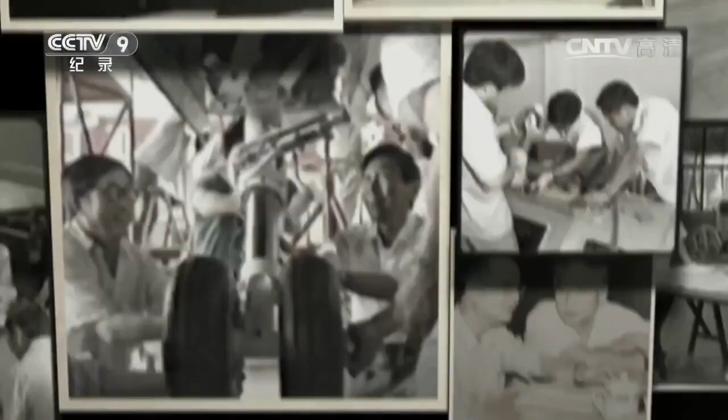The dream of generations of aviation people. 20 years of unremitting pursuit. Finding a way out on the misty ridge. Test courage in crises. This is a milestone in China's aviation industry. It is also a monument to loyalty and responsibility.

Third-generation fighter is equipped with new stealth technology and avionics system and advanced armament, which is effective for land or sea combat. While the J-10C fighters have been involved in actual combat training and played a great role in maneuvers, the Red Sword 2016 and 2017, J-10C is considered one of the best single-engine fighter jets ever made.

How could China achieve this in such a short period of time? Let's look back at the history of 20 years of how the J-10 had been developed. Today, the 10th China International Aerospace Expo kicked off in Zhuhai. The Chinese Air Force's aerobatic team also sent J-10 fighter jets flown by female pilots. They perform air ballet above the Zhuhai Sea.

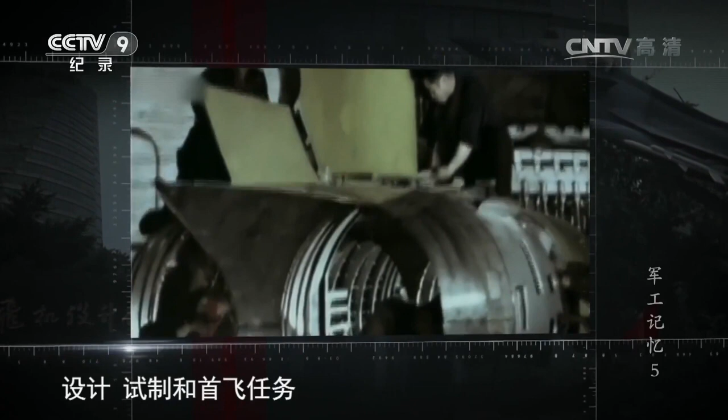This is Chengdu Aircraft Design Institute, where the J-10 was born. 40 years ago, due to China's strategic layout, these researchers moved from the northeast to the southwest. Just before the relocation, the research personnel of the institute had just participated in the design, trial production and first flight of the J-8 fighter jet. J-8 is a high-altitude, high-speed fighter, mainly undertaking air control and interception tasks. It is one of the main battle planes in the Chinese Air Force.

In the sequence of fighter jets development, the J-8 belongs to the second-generation fighter. At that time, around the world, the development of fighter jets had entered a brand new era. In the middle of last century, through several regional wars, people discovered that the high-altitude and high-speed second-generation fighters have limitations in actual combat. The flight range is narrow and the maneuverability is poor at medium and low altitudes. Weak ground attack capabilities.

The United States and the Soviet Union have been engaged in military competitions in this area. The F-15 and Su-27 third-generation fighters were developed respectively. They are much superior to the second-generation fighters in terms of overall performance, especially mid- and low-altitude mobility and comprehensive combat capabilities. The second-generation fighter will be hardly seen while turning, then you can see it when it comes back, because it has a very large turning radius. Look at the third-generation fighter flying in the sky. In normal weather, it will be within your sight.

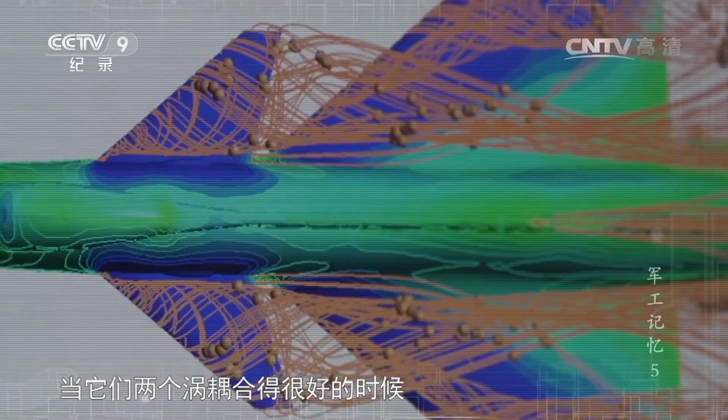Although there was some research on the canard layout when the J-9 was developed, it was still in the initial stage. This inevitably makes people suspicious. Song Wencong was assigned to refine the design plan as soon as possible.

Need another review. Once the plan for the aircraft is drawn up, there is still more work to be done. I said give me 1.5 years, but I only got 1 year. I said okay for 1 year. It was very difficult that year.

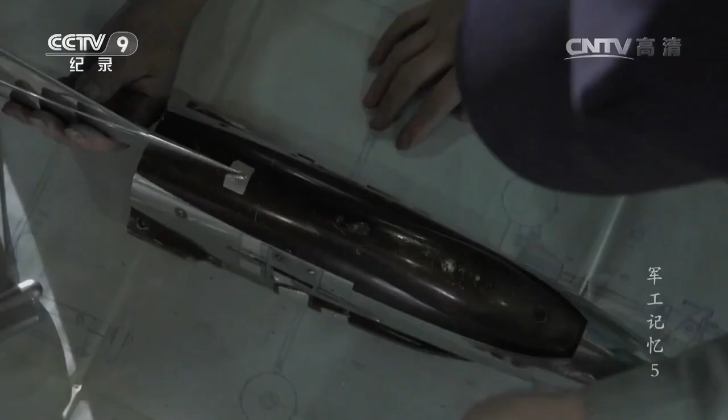The aerodynamic layout should be refined. A lot of wind tunnel tests must be done to simulate the state of the aircraft in the air. This is an essential step in the development of aircraft.

This is our model for high-speed wind tunnel tests. Due to the high speed and pressure in the wind tunnel, this model should be made of metal. The shape of the model is made completely according to the real shape of the aircraft.

The wind tunnel was high-end test equipment at the time. There is no wind tunnel in general research institutes. You could only go to the professional wind tunnels built deep in the mountains to do experiments during that time.

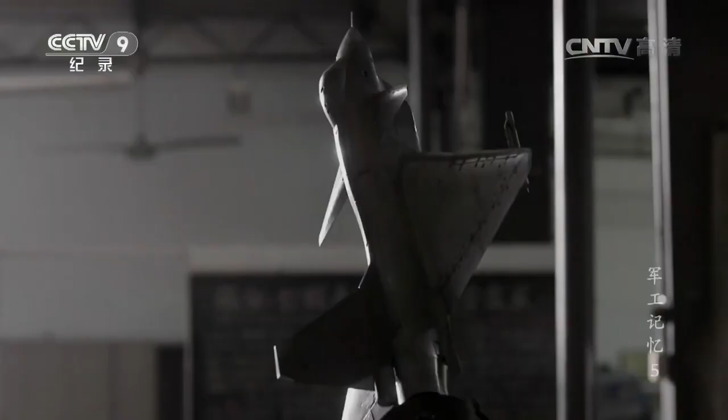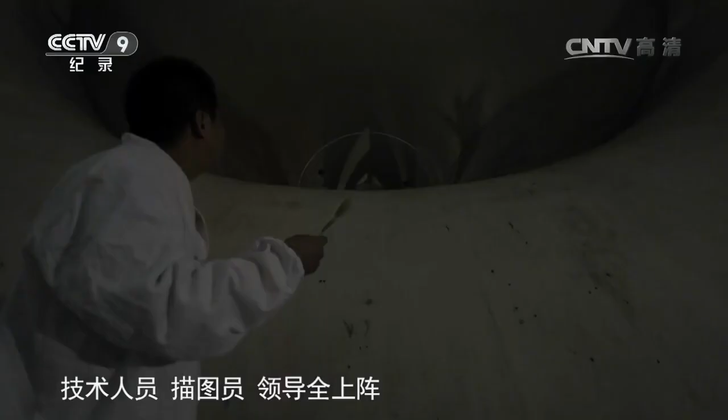When wind tunnel tests started, the technicians, plotters and group leaders all went into battle. We didn't have computers like today to collect data and process them. We had to write down and draw graphics point by point by hand. There was no such thing as getting it right at once. As long as a single curve was anomalous, we stopped right away.

So we often took our technicians along with us to do the testing, all in real time, all together. In 1 year, the team did nearly 10,000 wind tunnel tests, and finally came up with the overall plan of J-10. It was highly recognized by experts at the review meeting. After many rounds of argumentation and modification, in 1986, the J-10 project was officially launched.

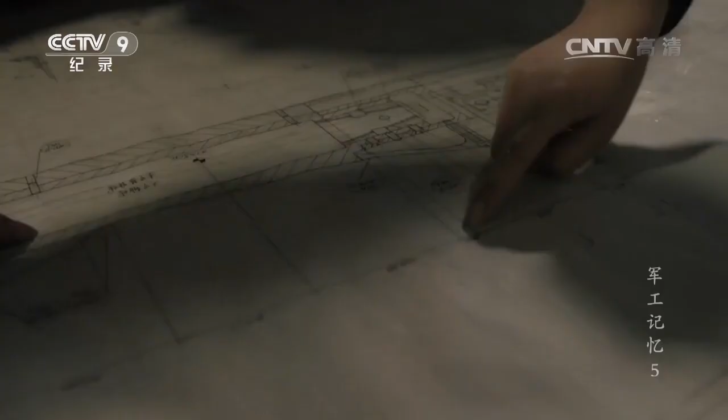As soon as they entered the refinement stage, they discovered that J-10 needed newly developed equipment. This project is far beyond the norm, because usually when a new type of aircraft is developed, according to the rules, its new content cannot exceed 30%. In other words, 70% should be inherited from legacy. Our J-10 actually uses new products, new systems, and new technologies that exceed 60%.

Many key new technologies were determined during the development. We counted there were hundreds of them, most of them key technologies. Among them the most challenging is the digital technologies.

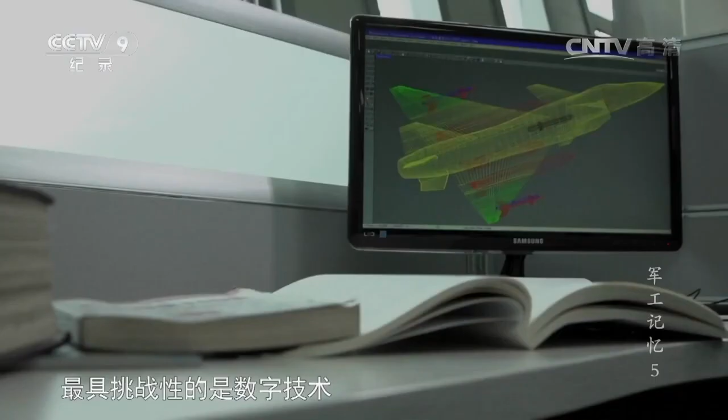The key difference between third-generation and second-generation fighters is that the mechanical operation method is no longer used. They are controlled by computers. This is a revolutionary leap. It is also the key to the performance improvement of the third-generation fighter. In the 1980s, computer technology just began to enter China.

Not to mention the experience, designers had to learn basic concepts from scratch. It's completely new, and we basically did not even know the concept very clearly. We were from the 1960s to the 1970s, and had been jumping into the 90s. This change was really too big, so we are on the same starting line as young people. Our previous experience is not too valuable on this new system. What you can do is learn by doing.

The first problem that designers encountered was the design of the aircraft control system. This is a core technology in aircraft design. For aircraft control systems, safety and stability are the top priority. But the core of the third-generation aircraft is that maneuverability and operability must be good. There is a big contradiction between the two.

What is the concept of operability? If the steering of a bicycle is too lively, we call it excessive operability. The bike will just throw you as soon as you turn it. If we have a very tight steering, you can hardly turn the bike; it's relatively stable but hard to make a turn, so operability and stability are a pair of contradictions.

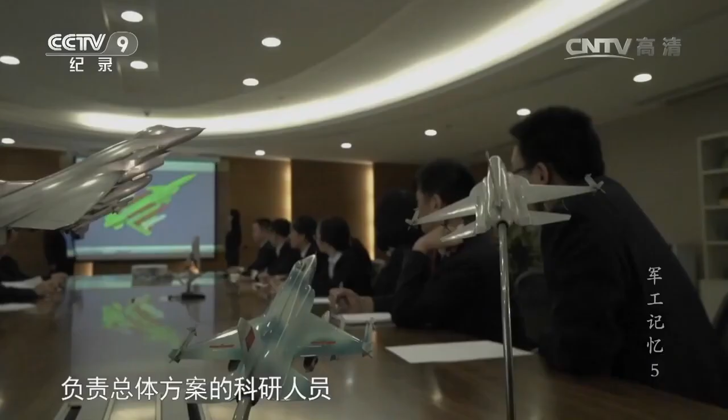At this time, the researchers in charge of the overall plan put forward a bold idea. We no longer use the mechanical controls of the past, but instead are controlled by computers. This is called fly-by-wire flight control. In the past, the rudder and wing surfaces of our aircraft were controlled by the pilot's control stick and pedals. They are mechanically connected to drive. For fly-by-wire operation this is unnecessary, as its displacement becomes an electrical signal which is transmitted through the cable. The fly-by-wire control brought a revolutionary change for the control of the aircraft.

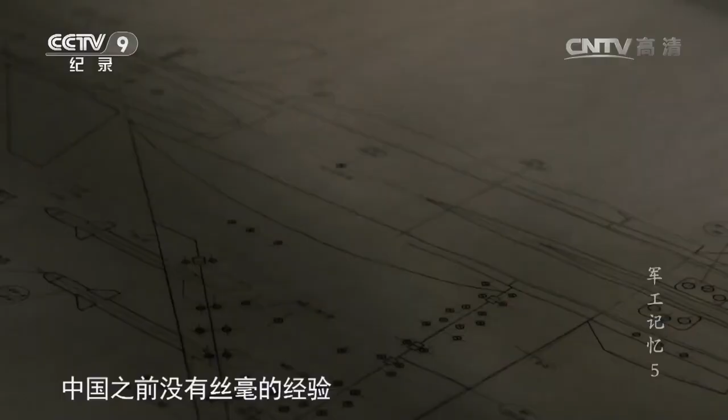The deflection of the rudder surface that changes the action of the aircraft is no longer directly controlled by the pilot; it is achieved through complex calculations of the computer. However, this adds too much uncertainty. China has no previous experience. Choosing this option means a huge risk. At the beginning, the leaders of the institute did not agree to adopt this plan.

Then I went to Mr. Song. I know he is willing to accept new things. Sure enough, after I reported to him, he agreed. We can't repeat others, walking step by step. Ours shall be better and more advanced. This is innovation. I think you must have this determination and dream.

Simply put, the fly-by-wire flight control system must analyze and sort all possible flight conditions in advance, and give a solution. The computer makes the judgment and emergency handling in complex situations. All shall be done by computer. However, the flight attitude of fighter jets in the air is very complicated, and there are countless situations that may be encountered. To ensure the safety of the aircraft, all circumstances must be considered as much as possible.

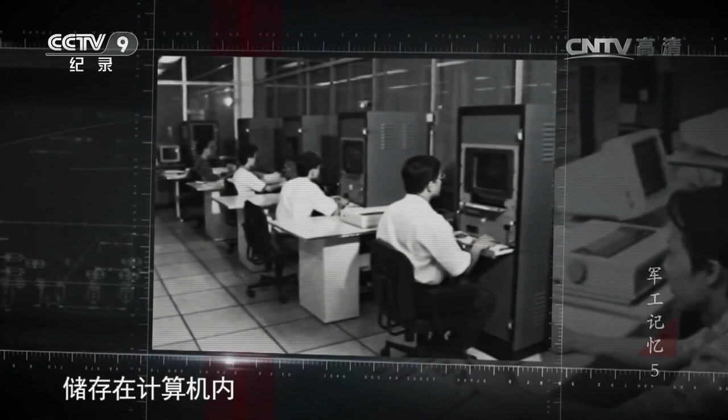In fact, the problem we focused on is malfunction. What should I do if there is a problem with the signal? As long as you can think of it, and as long as you think it is possible, you have to consider and deal with it. In other words, all routes must be set in advance, according to design requirements. Only failures with a probability of 10⁻⁷ occurring within 1 hour of flight can be ignored. Availability must be 7 nines. That is 99.99999%.

As long as you can think of anything else that may happen, you must design an emergency plan for it and store it in the computer. This is an extremely complicated and arduous task. It asks people to be meticulous and patient. After the design is completed, in order to eliminate possible safety hazards, test pilots are required to evaluate and experience it on the simulator. At least 2 pilots fly the same subjects we studied. As long as one pilot has a different opinion, a third pilot will fly again.

If the third or fourth pilot still has a different opinion, we must also fully analyze that pilot's opinion. Our designers are just great. They will immediately change and implement according to analysis results from the comments or opinions of the pilots. They don't miss any suspicious points.

During the development of the J-10, serious accidents involving fly-by-wire fighter aircraft from abroad continued to spread. Some planes even crashed and pilots died. This made the J-10 flight control system design team more nervous. They were all working overtime.

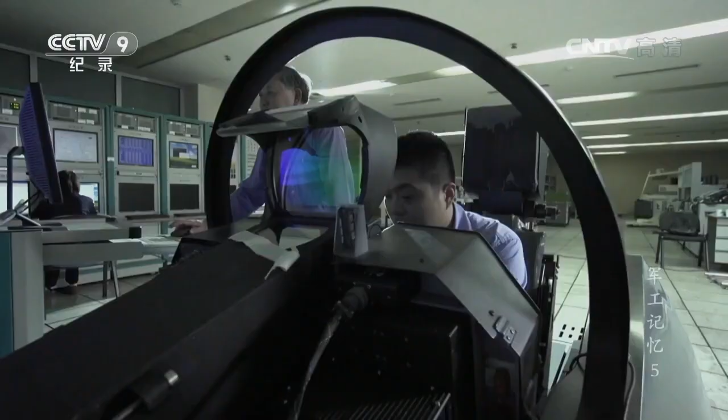Like the fly-by-wire flight control system, Zheng Qinglan, who is in charge of the aircraft's avionics system, also encountered computer technology challenges. The avionics system is known as the nervous system of the aircraft, through which the pilot controls the aircraft to perform various combat tasks. The avionics system of the second-generation aircraft is relatively simple. Each device forms its own system, but the mission of the third-generation aircraft is very complicated, and the previous legacy technology is completely inapplicable.

It has to hang dozens of weapons against air, ground, long range, short range, and aim at various moving and non-moving targets. With the second-generation aircraft this is not convenient, not possible. We need to build a network system. Start with the preparation of a brand new computer language. The avionics system designers moved forward little by little; from navigation to communication to the operation of dozens of weapons, everything must be programmed into software.

It took more than 10 years to complete the full upgrade of avionics. Every document is hundreds or thousands of pages. This workload is very large and very stressful. We work overtime every day.

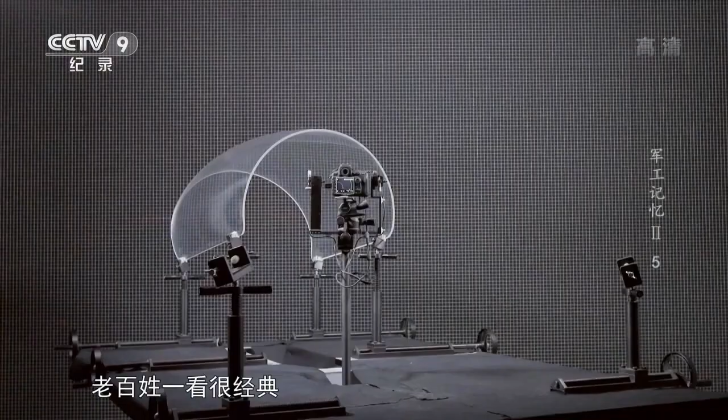The front windshield glass of the cockpit, professionally called transparent parts, was not the focus of the research. Unexpectedly, its optical distortion would become an annoying problem. The third-generation fighter has an integral seamless windshield, a hatch like a bubble, but its technology is completely different from the second-generation aircraft. The average company would not be able to make it.

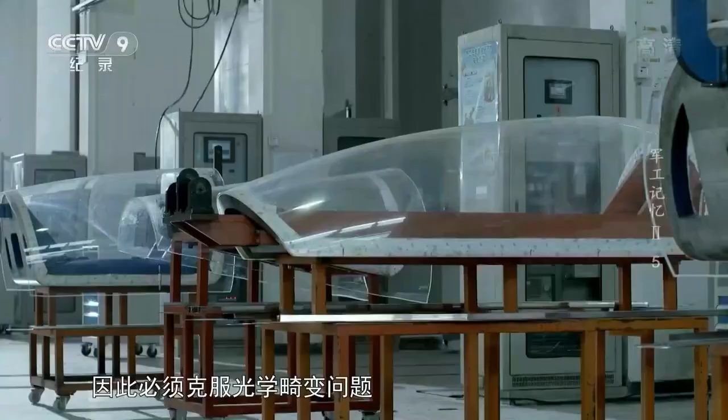The front windshield of the second-generation aircraft is flat. The third-generation aircraft has a curved windshield; therefore, the problem of optical distortion must be overcome. Deformation of the front field of view is very unfavorable for pilots in combat and flight. The unit responsible for the development of transparent parts was not successful. Wu Zuren from the Institute of Aeronautical Materials came to help and urgently discuss material issues. Because time was too tight, it seemed they could only rely on imports.

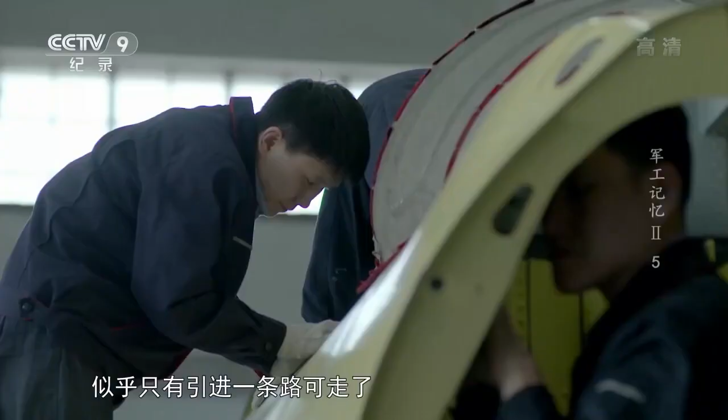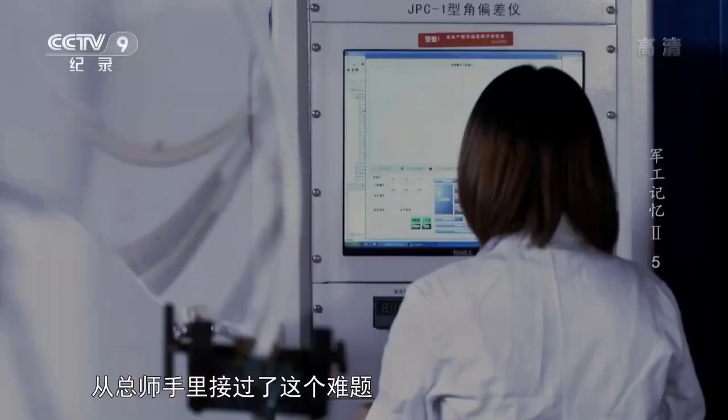This fighter is almost all domestically made. Now they said the windshield needs to be imported. This is too shameful. The Institute of Aeronautical Materials must take over this problem from the Chief Designer. In fact, they had done a thorough study of bubble-shaped transparent parts a year ago. After getting back to Beijing, they worked out a new plan to tackle this problem.

We need to shape it. This thermoforming process is also high-tech. After forming, coating, assembling, connecting, a set of comprehensive tests are required. This is a combined effort of multiple sciences and technologies. The institute gave the greatest support to the research team. They needed a key piece of equipment, but it exceeded the budget.

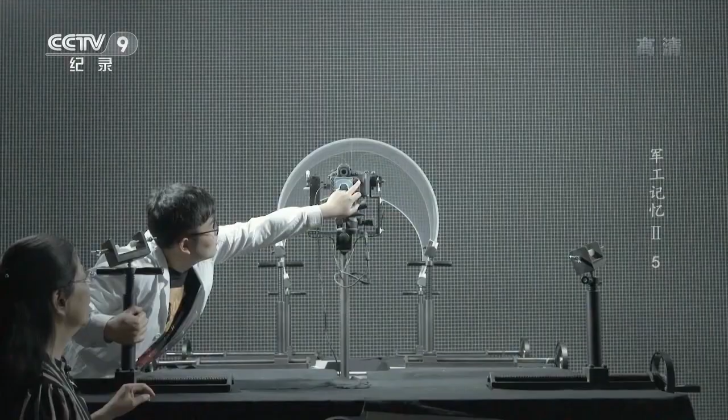There are many people who are worried. Zhang Lishan, who participated in structural strength design, had just graduated from university and came to the design office, learning about third-generation aircraft for the first time. He found that the long life requirements, high mobility and overload of the third-gen exceeded those of the second-generation aircraft.

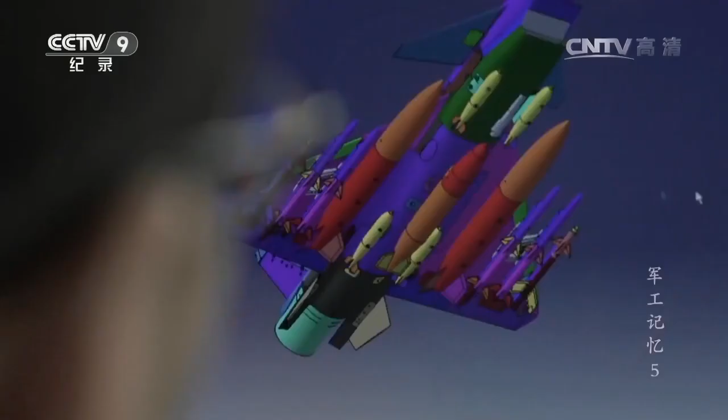What is overload? If you ride a roller coaster, you must feel several times your weight pressed against the chair. When the pilot is maneuvering in the sky, this multiple is a few times more than that of a roller coaster. The aircraft will be subject to a large overload. The third-generation aircraft have requirements for large overload and long life.

If the fatigue strength design of the aircraft is unreasonable, it is easy to cause early fatigue cracking of the structure. In minor cases, return to the factory for repair. In major cases, it could result in accidents. In general, increasing the weight of material will increase the strength, but for a high-performance fighter jet, this is not the way to go. Airplanes need a light body, but lightness and structural strength are a contradiction. There are contradictions and trade-offs everywhere in aircraft design.

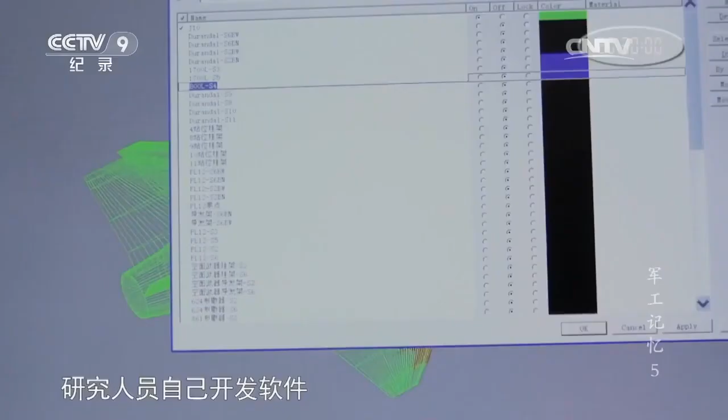In order to calculate the stress state of each part of the whole plane structure, the researchers developed their own software to divide the whole plane structure into many small units and calculate the stress of each element.

This is the first large-scale use of computer-aided structural analysis systems in aircraft design in China. At that time, we had only a single low-power computer and needed to keep on adding memory as needed. If we needed more speed, we needed to add more CPU boards. In the end, every computer we used was dead.

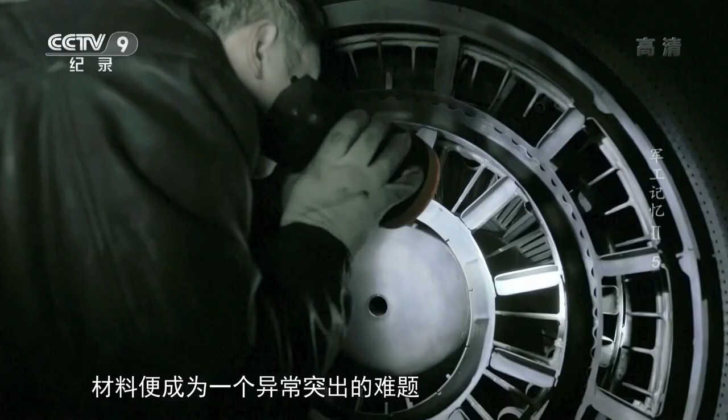When the research object changed from the second-generation plane to the third-generation plane, the material became an especially challenging problem. Of the hundreds of materials used in the plane, the materials used for the engine are particularly important. Wu Zuren, who studied abroad at the time, still remembers a picture. I was in an engine company at the time, and when they communicated with me, they came up with a PPT picture. It said that the contribution rate of materials to high-performance engines in the 21st century is 78%.

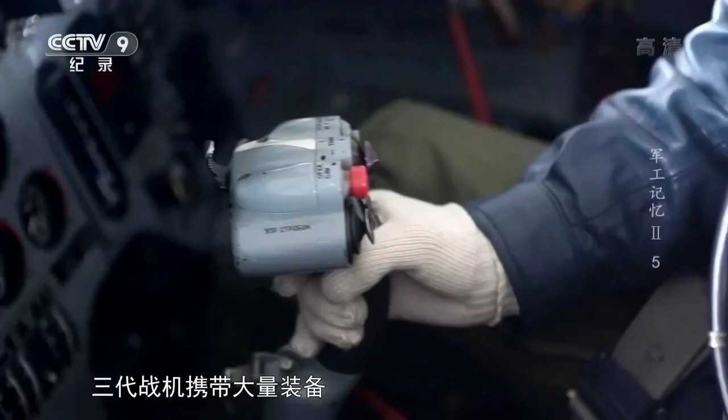High-strength, corrosion-resistant, and long-life superalloys account for a large proportion of third-generation fighter aircraft engines. The third-generation fighters carry a large amount of equipment, and the extraordinary overloads they endure during tactical actions require light and strong materials for the fuselage and wings. This in itself is a contradiction, not to mention corrosion resistance, long life, and damage resistance. Materials must go first, they are basic raw materials; without them, how do you make parts? Nothing can be said about the rest if we don't know what materials will be used.

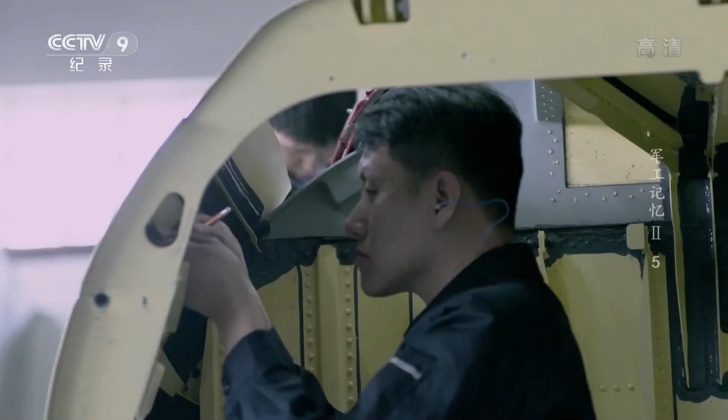Going back to the airplanes of the early days of human aviation, as people pursued airplanes that were stronger, more reliable, and flew farther and faster, light metal materials such as aluminum alloys gradually replaced weak wood during World War II. In order to enhance the electronic equipment of fighter planes and mount weapons, lots of effort was put into reducing the fighter's weight and developing new light and strong materials.

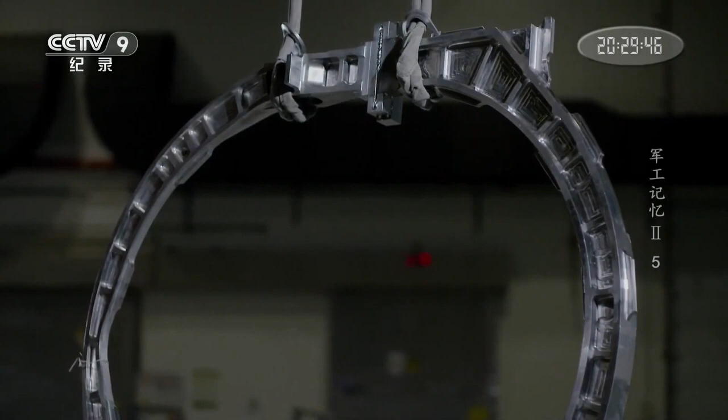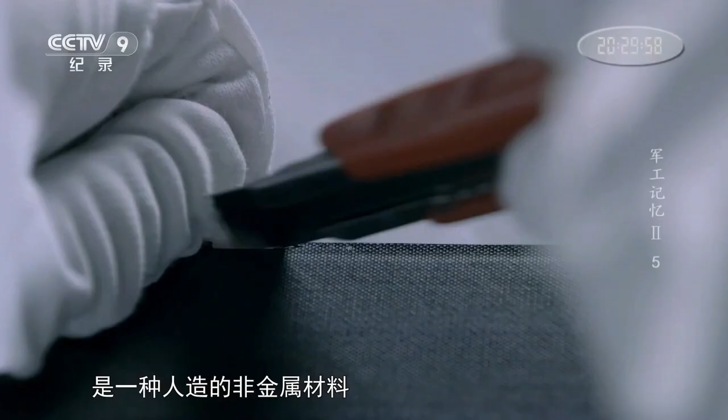Composite material is a man-made non-metallic material, lighter than metal materials. Chinese military industry is no stranger to composite materials. They had also been tried on previous domestic second-generation fighters. But at that time the entire country's industrial sector had not been able to produce composite materials suitable for third-generation fighters.

From the advanced nature of the material and its performance level, whether strength, durability, fatigue resistance, lifespan, corrosion resistance, etc., the gap was huge. The requirements for materials of the third-generation fighters are very high. It can be said that if the material problem is not solved, the third-generation fighter cannot be designed or built.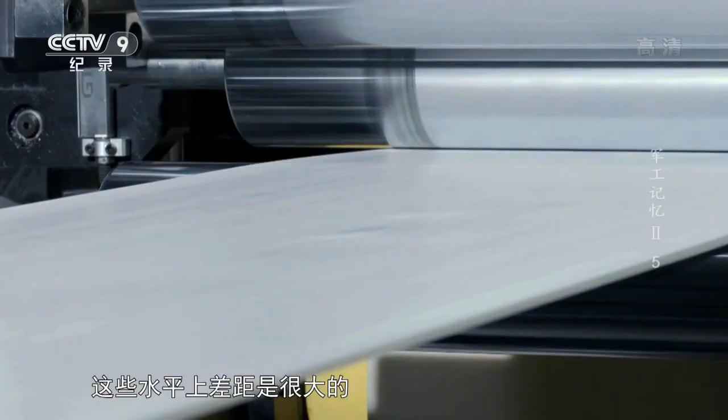When the wing uses wing-body fusion, composite materials are used. It is a big challenge for the bonding strength of every part to be met without defects. Composite materials are woven or combined from materials with different properties. They are finally made by combining the strengths of different materials according to the design of materials scientists, man-made materials to meet special needs.

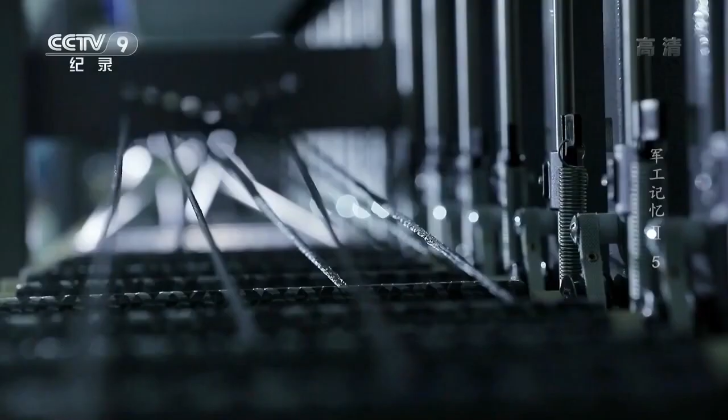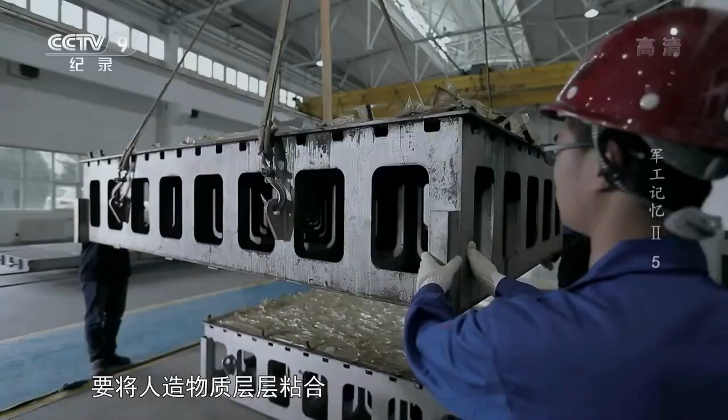The composite material used in the manufacture of the J-10 is made by bonding artificial substances layer by layer and hot pressing them into a whole. Success or failure depends on craftsmanship. At that time, the Aeronautical Materials Institute was the lead unit for materials and led more than 100 companies across the country to tackle key problems. At the time, I was in the Craftsmanship Institute, and from the craftsmanship processing perspective, I took the lead in completing the technological engineering process.

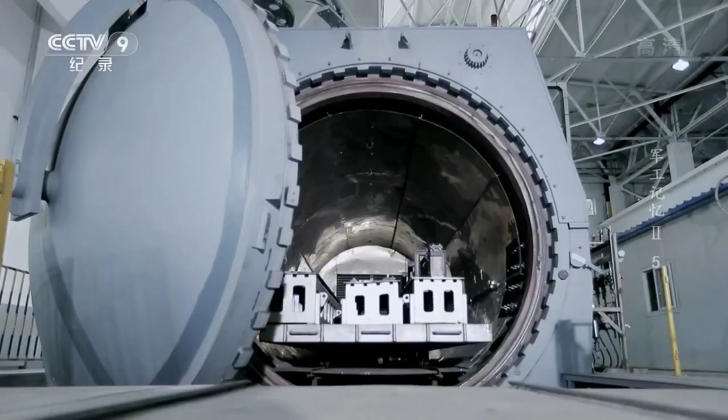The diffraction HUD can reflect the magic of high technology. It can display the data and images of the instruments on the front windshield and helmet eyepiece. The pilot can see all kinds of data without looking down. Although this technology has been used in some high-end cars, the diffraction head-up display of the third-generation fighter aircraft requires a large amount of display data and a wide field of view. It has high clarity regardless of day or night, forward light or backlight. It mainly solves the problems of low-altitude navigation flight and aiming attacks at night, significantly improving ergonomics.

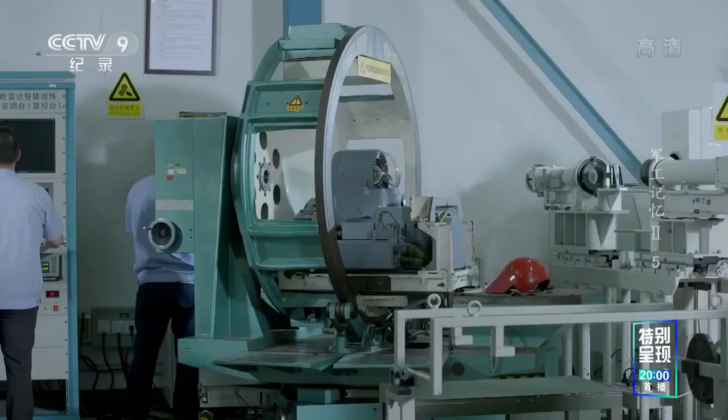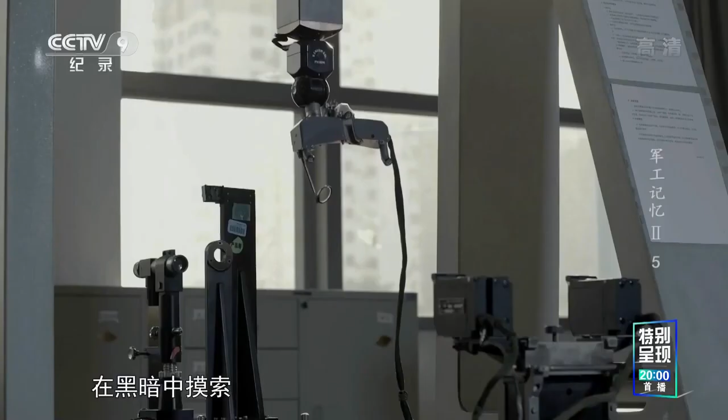The development of the diffraction head-up display was extremely difficult. Gu Gang's team groped in the dark. It wasn't until 1995 that they had a breakthrough, but after the breakthrough in 1995, no aircraft could use it. Until 2000, it could be equipped on the J-11B and J-10, but it was optional at that time, because they thought it still imposed uncertainty. There were technical risks and technical difficulties.

If you are sure of this good thing, you have to work hard, otherwise the team may disband. It may not be delayed for 3 to 5 years, it may be missed forever. We must take this opportunity to form the domestic power, avionics system, flight control system, and weapon system of this aircraft as soon as possible.

This is a focus of our research, and our airborne mission system. We must have our own weapons. Our own weapons must be integrated into this system. During the research and development process, the military workers constantly renewed its soul and blood, enriched bones and muscles. Similar to the fate of the diffraction HUD, there is the J-10 and J-11B domestic engine.

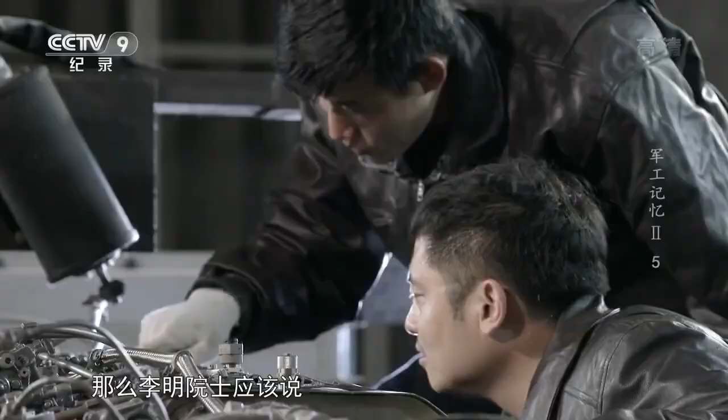This aircraft should be equipped with our engine. He advocated that domestically made aircraft shall use our own engine. At that time, there were many challenging issues with the domestic engine. Flight testing on the single-engine plane is risky. The suggestion was to put the domestic engine on the twin-engine Su-27 to test. We all cherish this opportunity. The Taihang engine finally got a chance to grow.

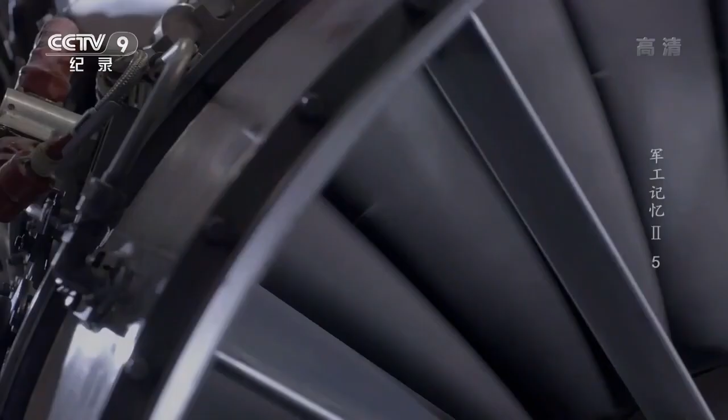However, the road to growth is long and tortuous. We once had a large blade break, which is equivalent to nearly 30 tons of force hitting the casing. It could break through the casing and damage the oil hoses, or even damage other equipment. A small turbine blade failure may cause an accident. It took another year to discover the cause of the problem. They overcame the difficulty of blade fracture. In those years, engineers solved 500 to 600 challenging problems.

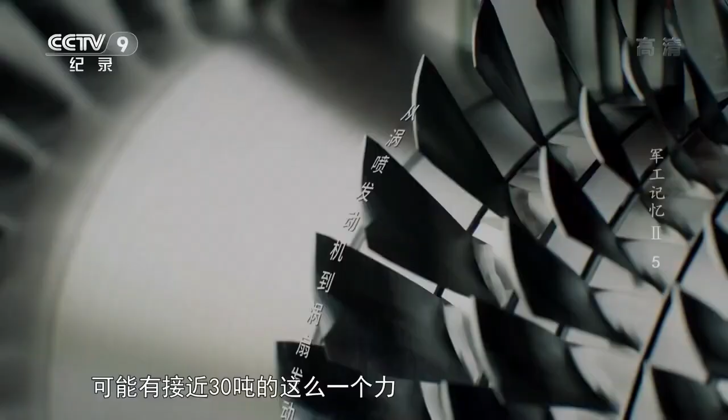I think the development process of the engine is a process of fighting failures. Engines are becoming more and more mature, while engineers have withstood the challenges and grown. After nearly 20 years of hard work, the development of the Taihang engine finally surpassed the most difficult stage and saw the light at the end of the tunnel. In the experience, there are also engine manufacturers that gradually matured.

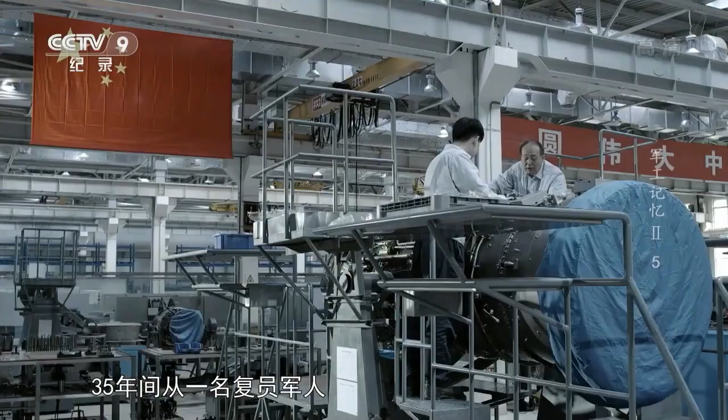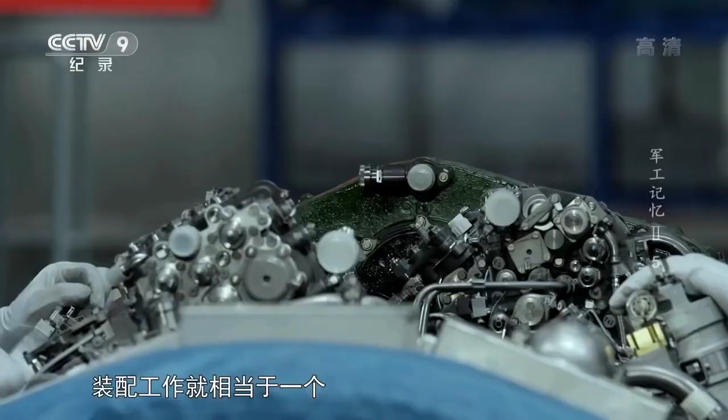Li Zhichang retired from the army in 1983 and came to the Liming Engine Manufacturing Company. His contribution is to greatly shorten the production cycle of the engine. Assembly work is like brain surgery. You just cannot change the surgeon. We have developed a shift operation guidance process. When needed, we can operate 24 hours a day. Training a good engine assembler is no less than training a pilot.

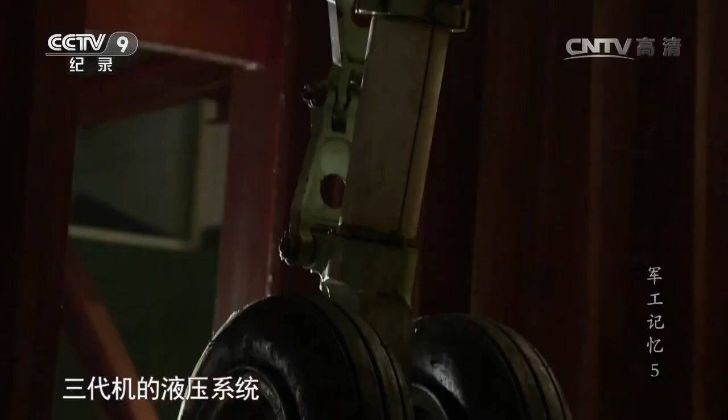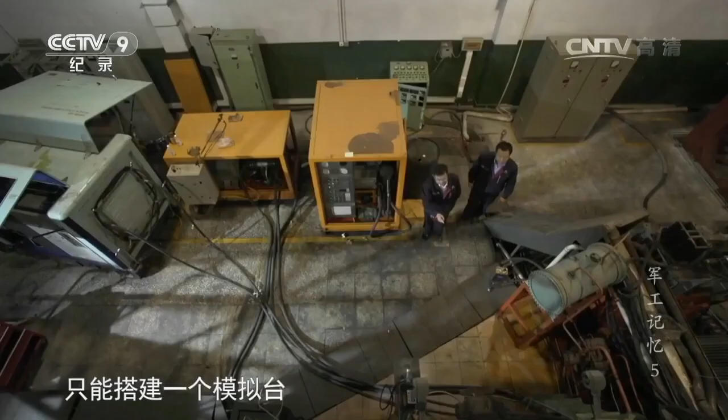There is also a crucial hydraulic system in aircraft design. It is like the blood circulation system of an airplane, transmitting energy and power through it. The hydraulic system of the third-generation fighter is much more complicated than that of the second-generation fighter. There are thousands of test points. At that time, computer simulation technology was not yet developed. So we built a physical model. According to the geometric layout of the aircraft, it is simulated completely one-to-one.

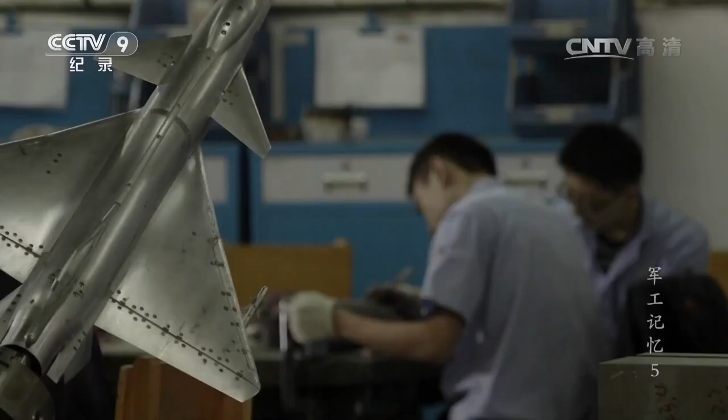As long as there is an oil leak, the entire system will fail. We could not be careless. At that time we didn't have weekends. We were all here working every day, constantly revising, constantly approaching. No part of the design is done all at once. We did it over and over until it was right. The design of each system of J-10 has gone through countless iterations. There were probably over 10,000 or 20,000 people who worked day and night on the J-10 project.

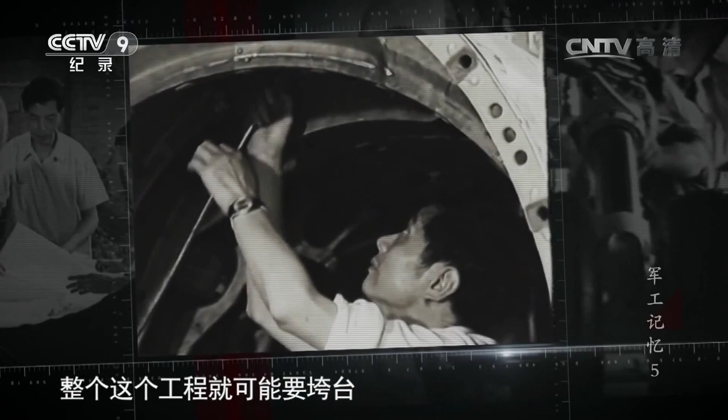In the eyes of many people, innovation is an activity full of creativity and fun, but for the developers of J-10, it is boring work year after year and day after day. They gritted their teeth and did not give up. I am happy to finish today, but I am worried again tomorrow. But at that time, everyone had a high spirit and didn't feel tired, because when people are really excited, they don't feel tired. It feels like a state of real passion burning.

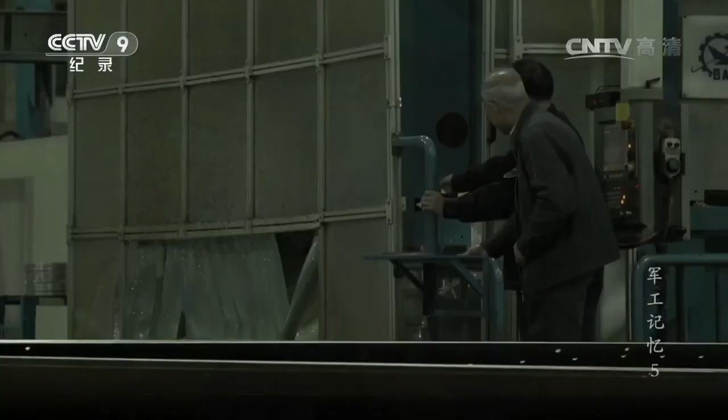At that time, I followed the plane in the shop every day and had very little rest. I didn't rest until 1 or 2 at night. Sometimes I didn't go home until 5 o'clock, then returned to the factory 3 hours later. The whole factory is like a battlefield. People from all departments are mobilized, because they are facing an aircraft like never before.

A large number of integral structural parts appeared in the J-10 design. The shape is complex and the precision requirements are very high. With previous machine tools and the milling machine, they just could not do the jobs. They had to use digital processing machine tools.

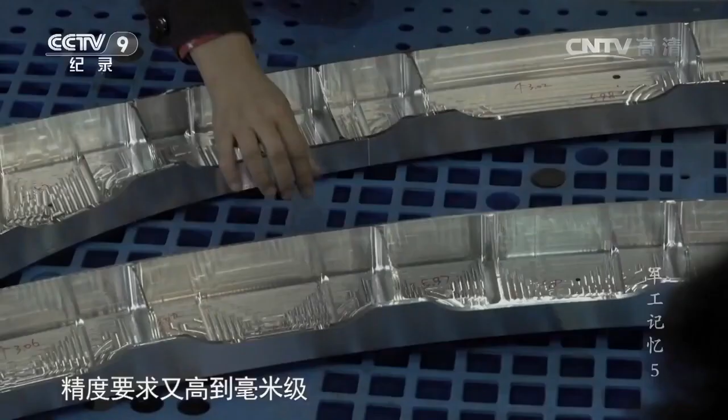Gian Yingzhang is responsible for the technical research of this project. At this time, in the National 863 program, there was a subject of computer-integrated manufacturing. She asked the group of experts to join and then started from the most basic program design. They were designing and experimenting while manufacturing, doing all at the same time to make digital tooling machines.

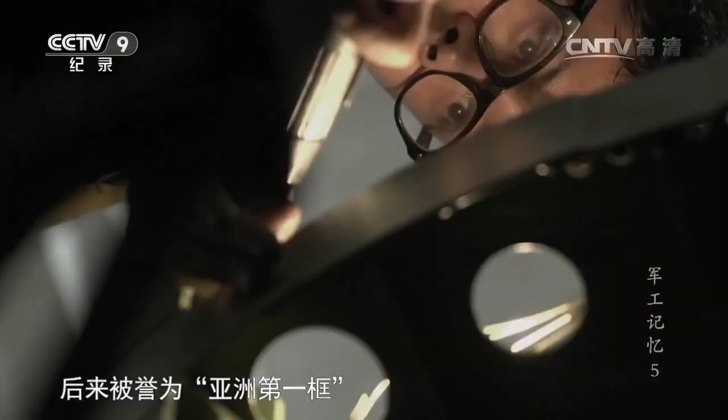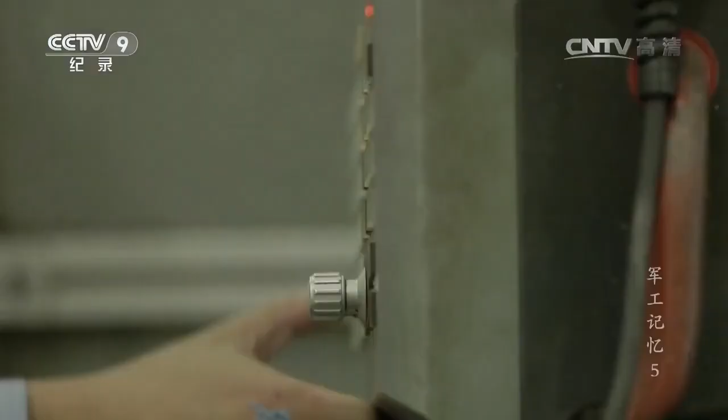Among the structural parts of J-10, there is an integral frame that is particularly complicated, which was later known as the first frame in Asia. For this, people spent several months programming in order to make this one. At a time when ready to go, the machinist could not dare to press the start button. He was so afraid. Yes, everyone was under great pressure at that time.

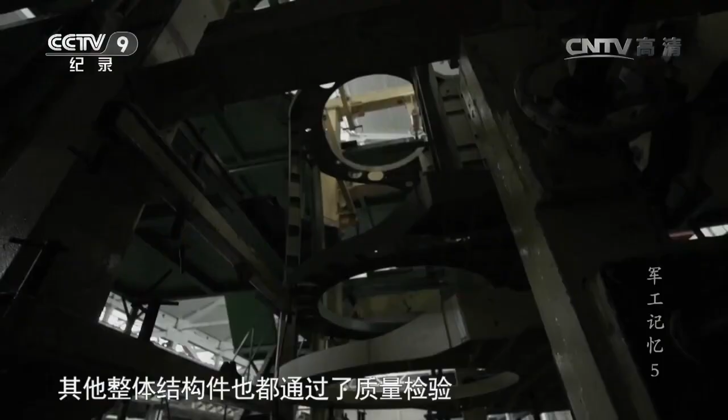Finally, Asia's #1 frame was successfully processed in one go. Other integral structural parts have also passed the quality inspection. This is a pioneer in the history of Chinese aviation. However, Gian Yingzhang also felt a little afraid afterwards, because her development process is against the norm and rules.

An old expert told me, "You are so bold, you are developing and applying at the same time, you are not afraid of failure." I said I had no other way, I was forced, I do not have time, I can only succeed but not fail. We have no day and night, no weekends, no holidays, all of us are in the computer room and shops.

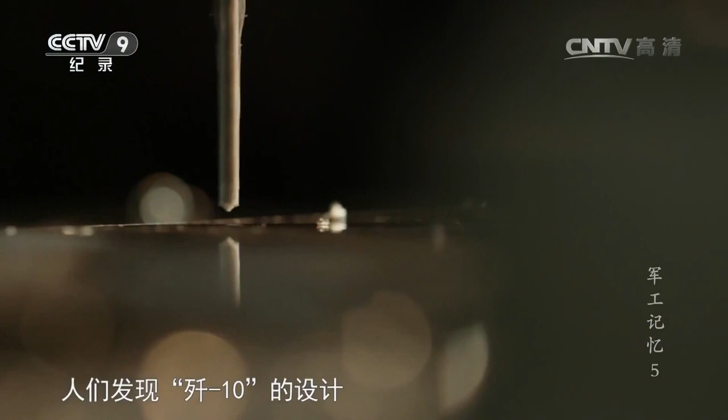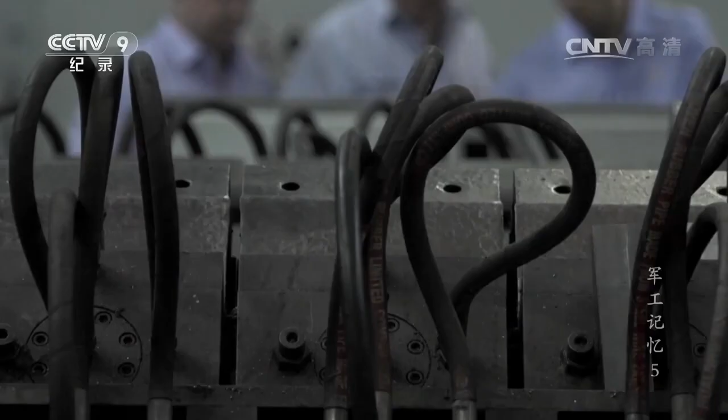The design that crosses the age brings many unexpected difficulties to the craft. In the production of aircraft skins, the wings and the fuselage are required to be a whole, but it is not regular but curved, so-called S-type skin. They must have new professional equipment with a pulling force of more than 1,000 tons, but at that time they only had old machine tools that produced second-generation aircraft.

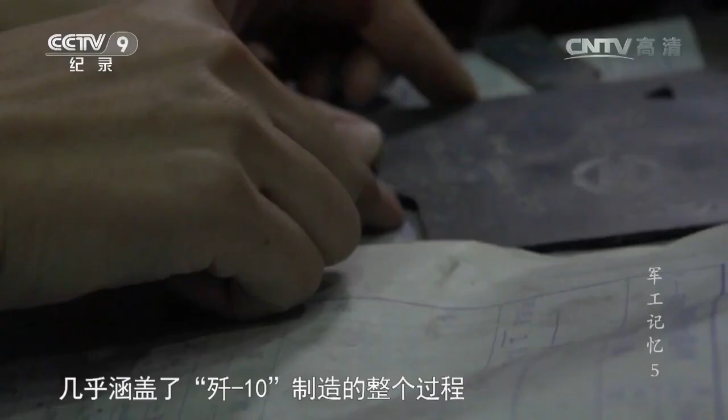Then we figured out how to make an upper pressure device on it. We used a lot of small jacks. It took them 2 years to finish. Such process difficulties almost spread over the entire manufacturing process of J-10. Even small connectors and pipelines may have required research teams to be set up to encounter the challenges, not to mention the important parts of the aircraft.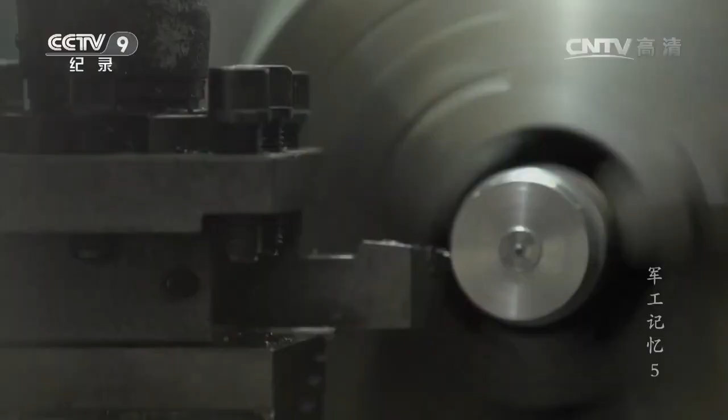Finally, all the difficulties are past, and it is about to enter a stage of the whole plane assembly, but in the important portion of the plane, the landing gear encountered a problem. The landing gear has to bear a huge impact. The instantaneous maximum force is dozens of times the weight of the aircraft. It has the same lifespan as an airplane. According to the design, it is an integral structure. The traditional welding process simply cannot be achieved.

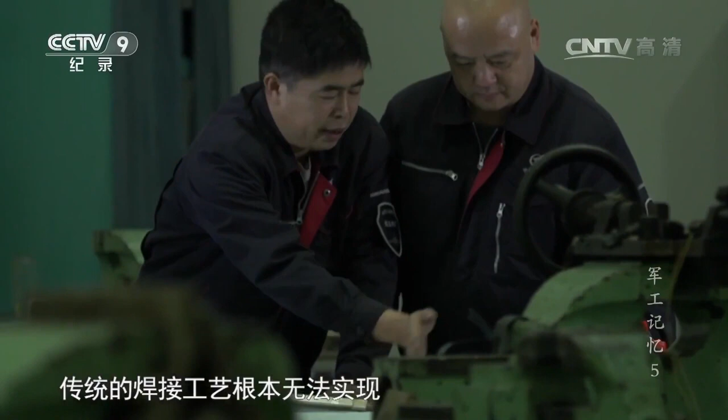Because the process is too difficult, they have considered cooperating with foreign companies. They had several negotiations but all ended with failure. At this time, the final assembly task was very urgent and only less than half a year left.

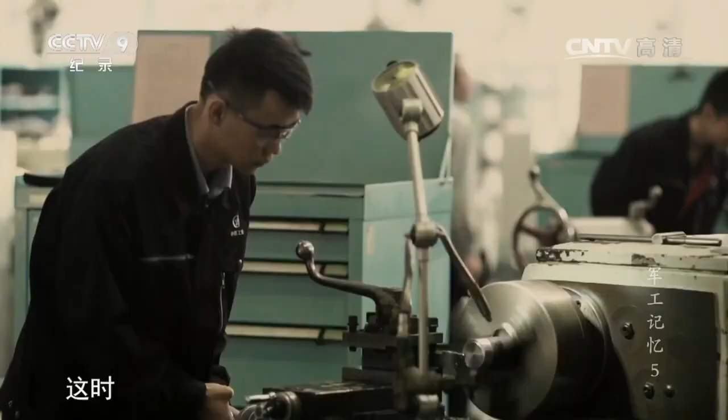The production cycle of traditional landing gear generally takes more than half a year, not to mention the new landing gear. There are still more than 10 key research projects to start from scratch in this landing gear.

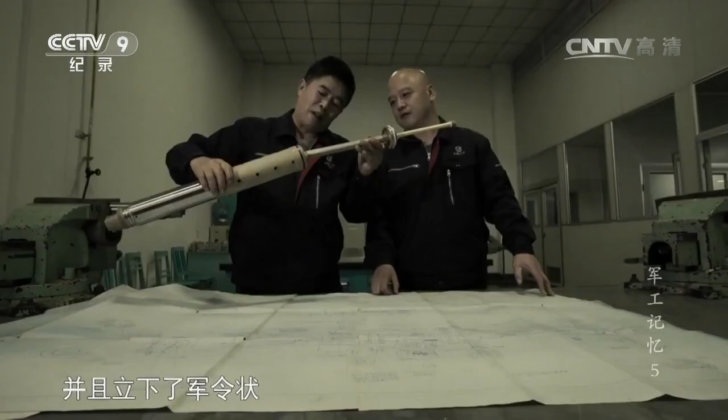In an emergency, Zhang Lin and his team from the hydraulic shop offered to undertake this task. They worked day and night, overcame countless difficulties and finally finished on time. The J-10 landing gear has become a legend.

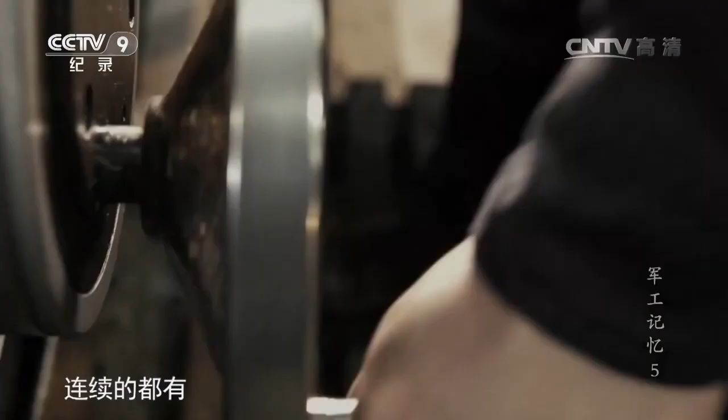In fact, in the manufacturing process of J-10, there are more trivial things than the legend. J-10 is the first time we started to use the integral fuel tank. The internal pipeline is very complicated. Assembly and installation can only be done by people who had to climb inside.

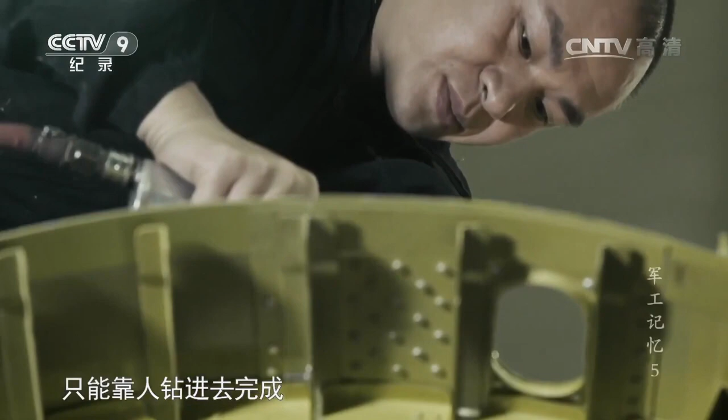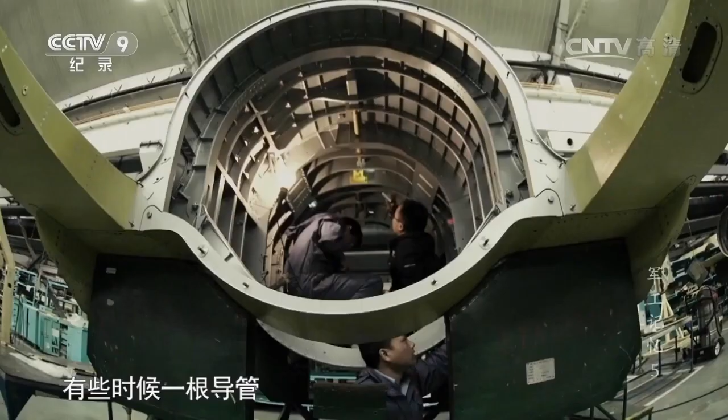Because the space is small, it's easier for me to climb into the fuel tank, so I take on this job. Sometimes I have to climb inside dozens of times just for a single fuel line. I did it day and night. A week later my soles were all worn out, my thumbs were all outside the glove.

I grew up in the countryside. After coming here, I found the plane very interesting. I love my job and decided to work hard. Our workers are so wonderful, they don't care about these. They worked hard and worked overtime all the time.

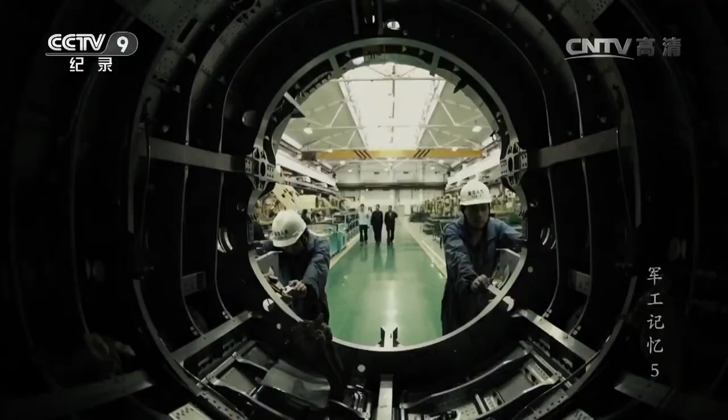By 1997, the first J-10 aircraft was finally assembled. Liu Huaqing, then vice chairman of the Central Military Commission, came to the scene in person to participate in the first flight ceremony.

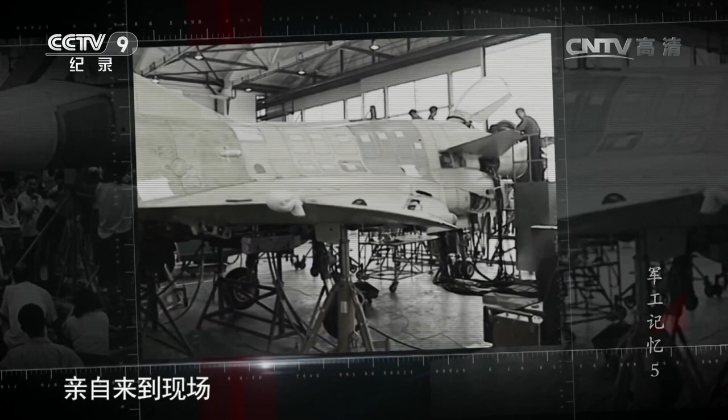He and I pulled the plane symbolically. While pulling, he was saying, "Great, great." I turned to look at him, his eyes full of tears.

Everyone is looking forward to the first flight. The time is set for March 12, 1998. In the afternoon just before the first flight day, a routine inspection of the aircraft was required, then reported to Commander Liu Gaozhuo, who needs to sign and release. It's almost 8 o'clock. Why haven't you come to tell me? Before long, the on-site commander reported that the engineers had discovered 3 drops of oil while inspecting the engine.

At this time all preparations have been completed. Related personnel and leaders will arrive from Beijing the next day. To fly or not to fly? At that time, what I thought was we got to think of quality first. Not afraid of 10,000, but cannot afford a 1 out of 10,000 chance of failure. Everyone asked me what to do. I said to notify Beijing to cancel the test flight tomorrow.

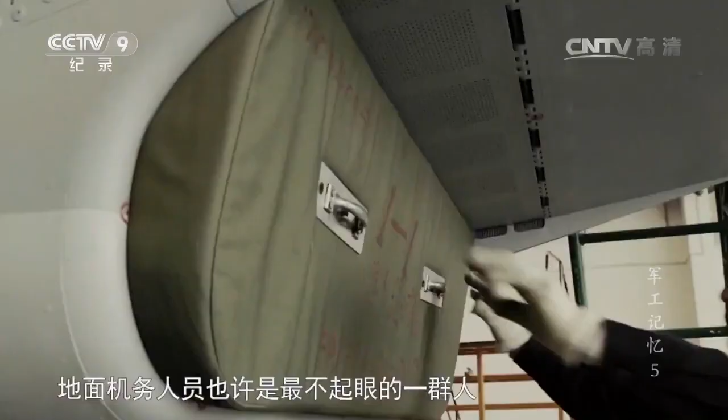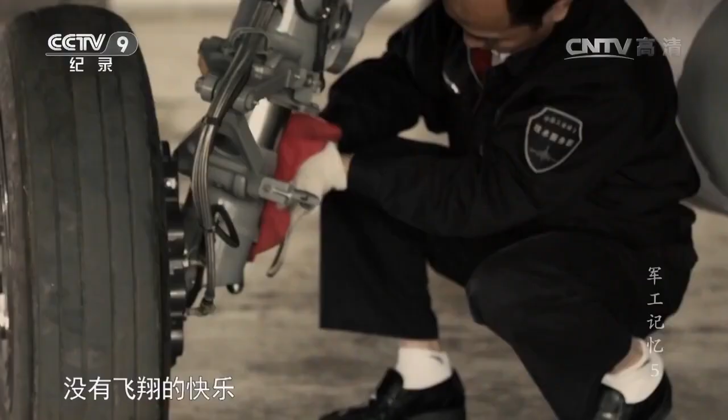During the flight test, the ground crew may be the most unnoticed group of people. They wipe and check the plane every day, make preparations before the test flight, and check after the test flight. They have neither the joy of flying nor the sense of accomplishment in overcoming technological difficulties. Many hidden dangers were avoided because of the timely detection by the maintenance personnel and other ground crew members. Especially when a flight failure occurs, the crew must discover the fault as soon as possible, regardless of how hot or how cold that day is.

Once there was a system failure, our crew worked from morning to night and did not find the cause of the problem. He also felt a sense of self-blame. It's so cold, he hasn't eaten dinner yet. It's just that he worked so hard. It seems both pride and shame energized him. I don't think there are any vigorous deeds. What he should do, this is his duty. They use their actual actions to interpret the meaning of responsibility.

In the course of several years of test flights, more than 1,000 details, large and small, needed to be improved, but there has not been a serious accident. It's not just first-class and second-class accidents; even third-class accidents never occurred during those testing years. What is a third-class accident? If the aircraft is damaged during test flight, it must be returned to the factory for repair immediately. We have nothing like this. This can be said to be a miracle in the history of world aviation, and this miracle was created by thousands of dedicated people. In 2003, the J-10 was commissioned into PLA Air Force service.

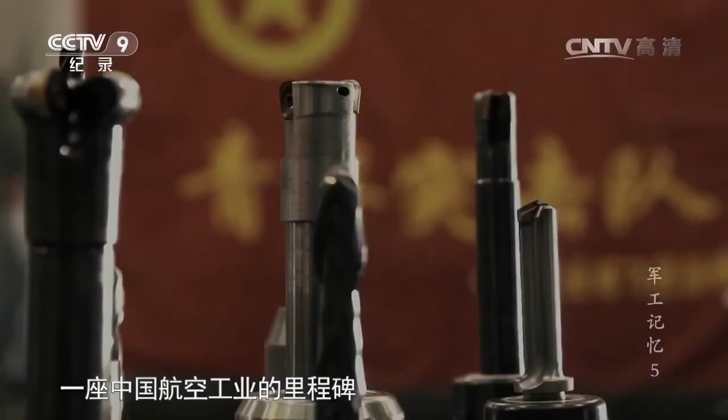18 years have passed since the establishment of the project. Yan Xiang, the former director of the J-10 Project Office, said his 18-year-old son finally joined the army today. The wealth that J-10 leaves to people is far more than a cross-age fighter jet. It is a milestone in China's aviation industry. For many researchers who have participated in this project, J-10 is the deepest memory in their lives. It is also the most sincere and passionate emotion to them.

Overcoming all kinds of difficulties and working selflessly means wholeheartedly making this airplane great. I am very satisfied with this opportunity to do what I want to do. I like this line, I really like it. I like J-10 just like my own child. With this J-10 basis, you will find it very good to develop other models. In this regard, I feel that this is a reliance.

From the beginning of the demonstration in 1984 to the finalization in 2004, 20 years have passed. Tens of thousands of people have dedicated their youth and passion to J-10, and to the dream of serving the country through aviation. Many scientific researchers who made great contributions have now passed away. Some of them did not even live to see the first flight. The vast majority are unknown heroes who worked in obscurity. In the 20-year history, a considerable number of people did not see the results. It was as if a relay race led everyone to the last baton. You can see the flowers and you can see the honor, but I think the people in front are greater.